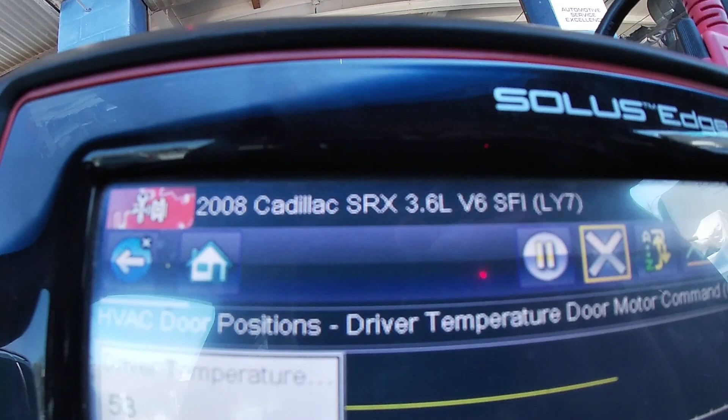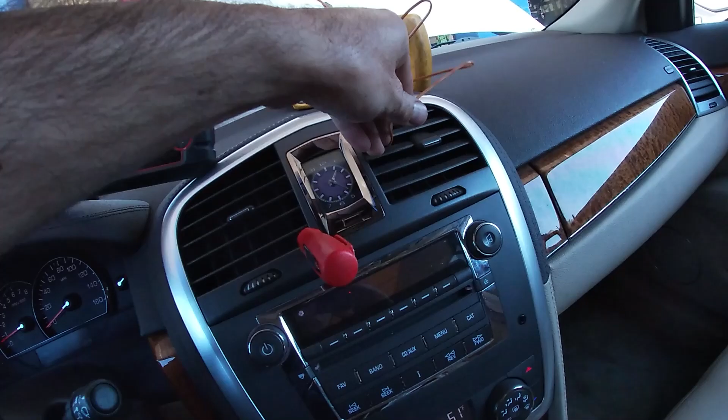Got a 2008 Cadillac SRX with a 3.6. HVAC. Air conditioning, we got 50 degrees on the driver's side, and the passenger side, this says 150, but it's a little dramatic, clearly. So I'll put it in the driver's side. Switch over here to verify our equipment. Come down 79, 75. So I'm going up to 140. Oh, so it might be pulling 150. Might be accurate there.

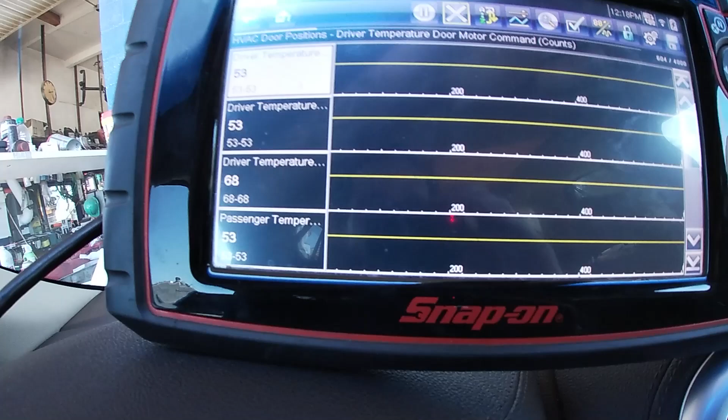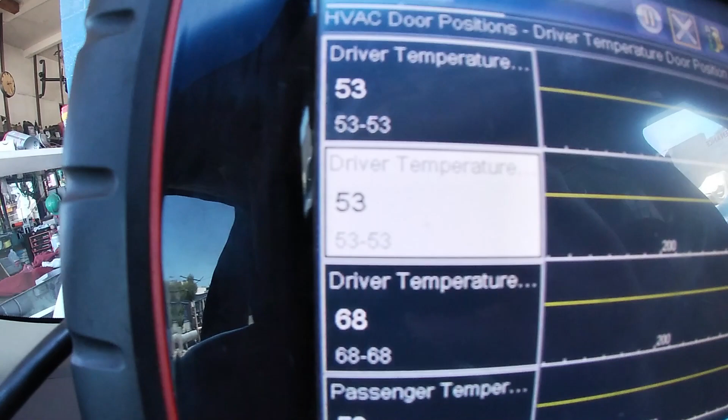So 58. So what we got is dual climate controls, driver temperature, motor command, and counts. And then we got an actual position, 53, and then the temperature, 68. It's in even numbers, so it should be 68. Oh wow, odd number. But then it skips 70, so that doesn't make much sense. But 69, gonna go down to 60, and we're seeing the drop. Goes down to 62 minimum, go back up.

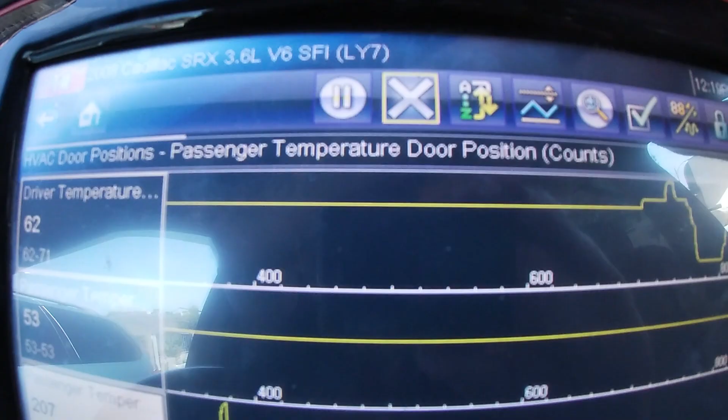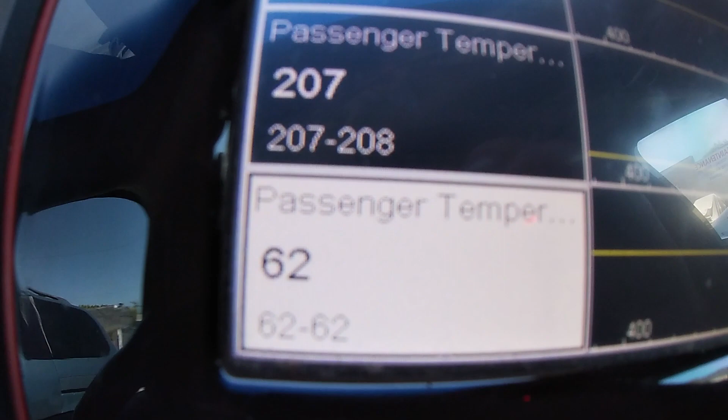I can feel a slight change, not much. It's only 60 to 70. Let's go back down. 61, we're gonna be looking at passenger side. So right here we got door position and counts 207. Passenger command 53. There's the problem. 62. So the control head is working, sending the signal out to the actuator. So let's verify power and ground and hopefully a potentiometer signal of some sort.

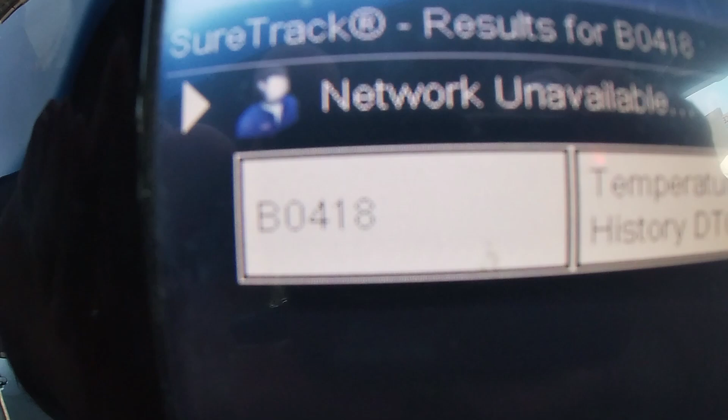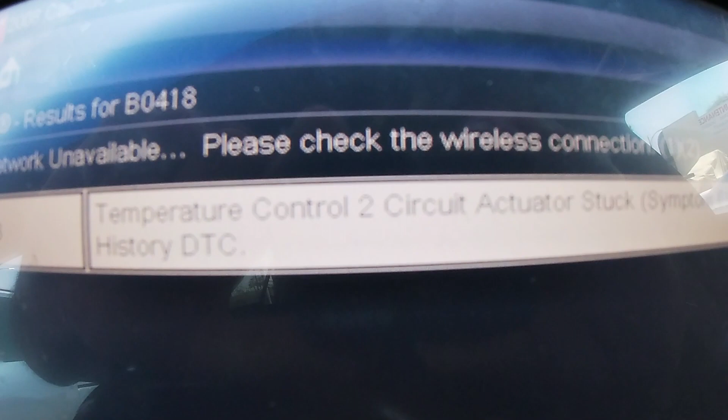And then on that, I'll show you the code real quick. 146 now. Wow. And it is a B0418 Temperature Control 2 Circuit Actuator stuck, current and history. So blend door 2 passenger circuit actuator stuck. So let's verify power and ground and just see some sort of movement on one of the wires.

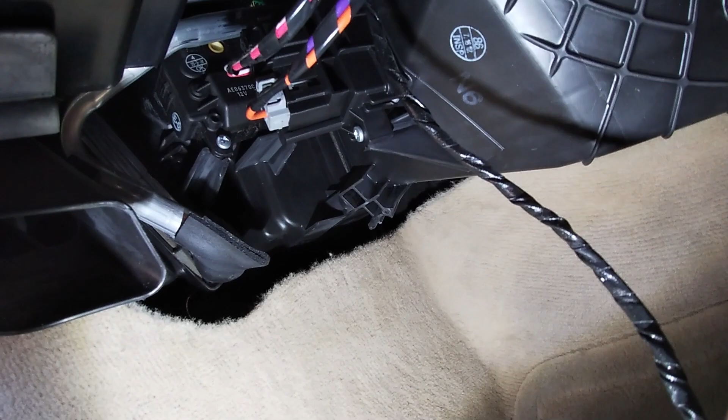Well, welcome to the belly of the beast. There she blows, right there. Here's the blower motor resistor of some sort. Okay, well anyways, yep, out there. And they did a great job in putting the heater core pipes right in the way of the top bolt, top screw on the top right hand corner. So I don't know how I'm gonna get it out, but I got this one a little loose. And gonna try and get that guy. See if I can get a light up in there. Oh, it's not in my face. Right there. Stupid.

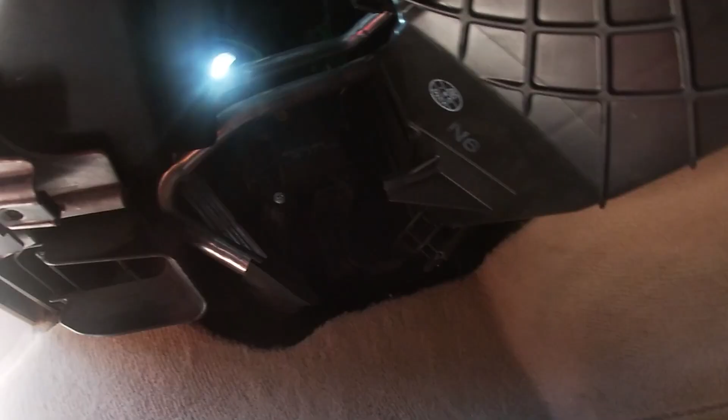Got the blower motor resistor because there is no way to get to it. So I guess right now I could check electrical, but I might as well check electrical and watch it move. But yeah, this pipe, man. Why would you guys do this? Man, everyone's doing the driver's side. I guess I'm lucky.

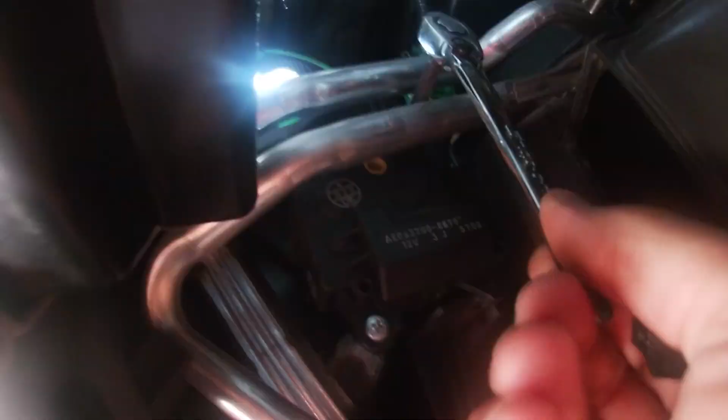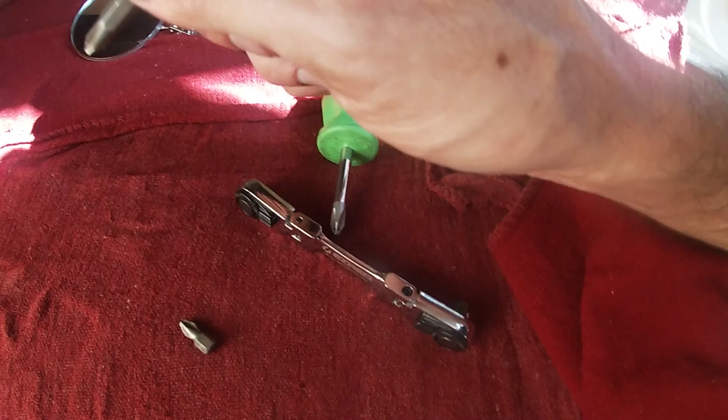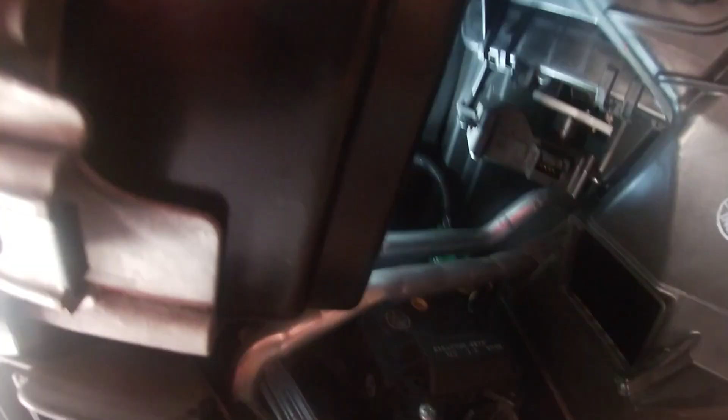I'm doing it. Oh, no. Doing it with the, because the short guy's right there. So long Phillips bit. I was using the Easy Red, but it was giving me too much flex I didn't need. So keep it straight, right angle. Just doing it. We're getting there. We'll get her out. I promise. There it is.

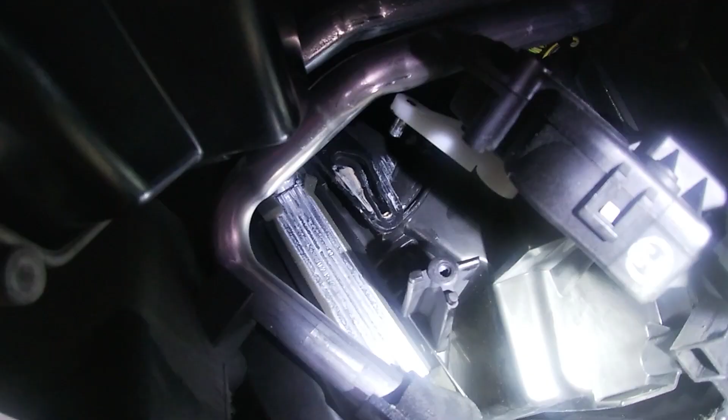Gonna be hard to show. Alright. Whoa. Hey, how's it doing? As you can see, here's the passenger side air temperature control motor 2. Air mix motor, blend door motor, whatever you want to call it. SAE, Society of Automotive Engineers, please make a term for this and let's just all call it that. But you know how manufacturers are. So anyways, oh, there's the door. She's free flowing. So most likely the actuator, obviously.

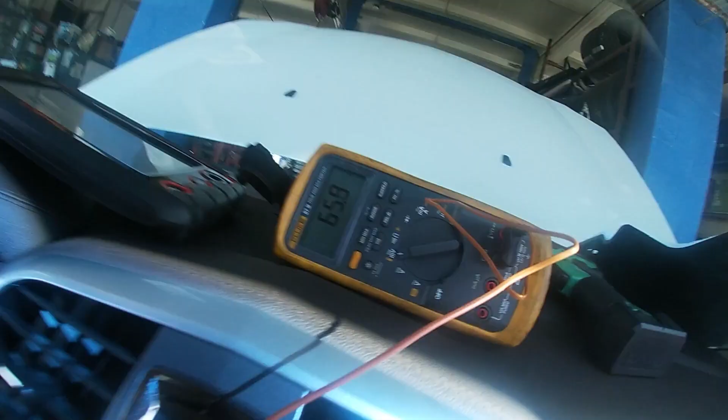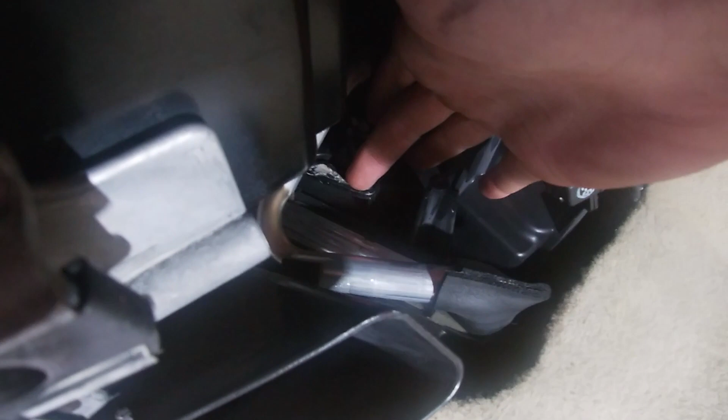It's a warm one today in California. Get the windows open, doors open. The point is, it's a little cold on both sides. Blow. Cool on the other. So I'm gonna move the door. In the upright position. And now we got heat. Core pipe. So tech tip, do the job when it's cold.

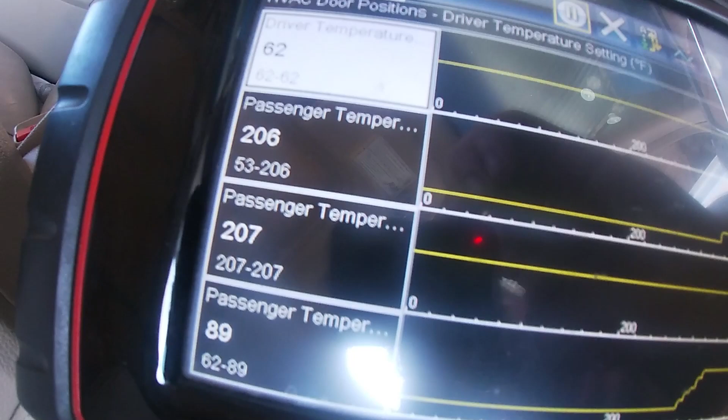So now let's press some buttons. Well, let's press some buttons with the scanner and let's watch the actuator move. Alright, I haven't put the scope on it yet. Part's coming tomorrow, so I have some time. So here's the passenger side. I'm gonna hit hot. We went all the way to 90 degrees. And actually this is the desired and the actual matching each other now. Full heat, 206, 207 counts. So now we're gonna go down on the counts.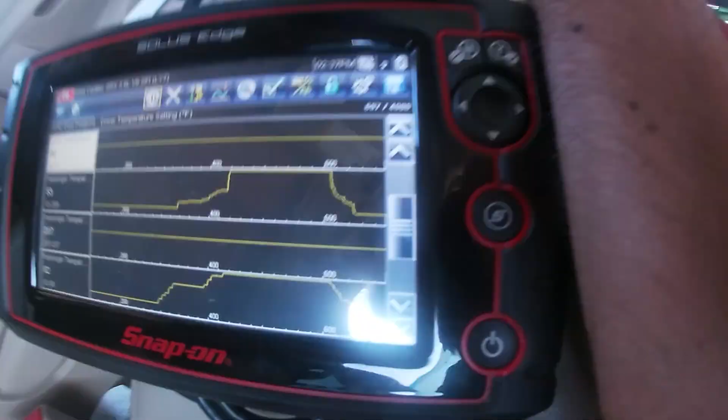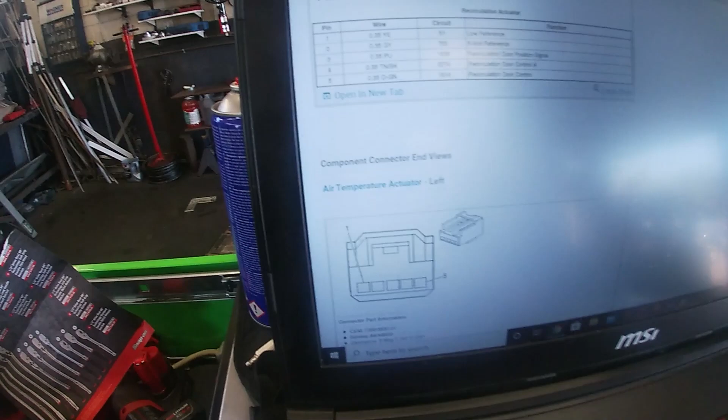That arm is stuck. We got command. Nothing. So from this, I got the temperature. So now the testing I can do is do key on, be quieter. I just want to do some voltage checks and I'm done. So here's the, oh, it's mode. Recirc, air temp left, and air temp right. 5 wires.

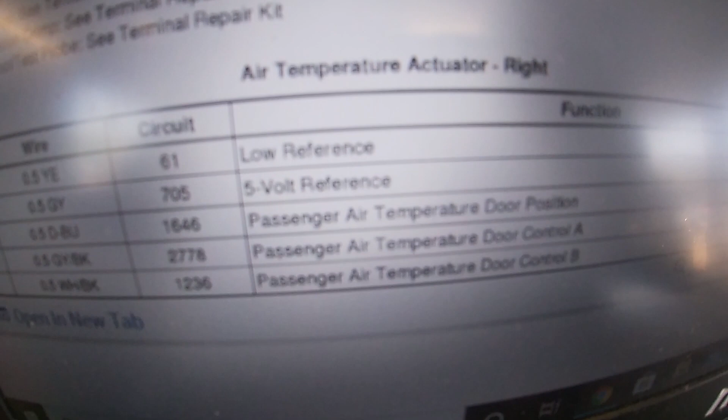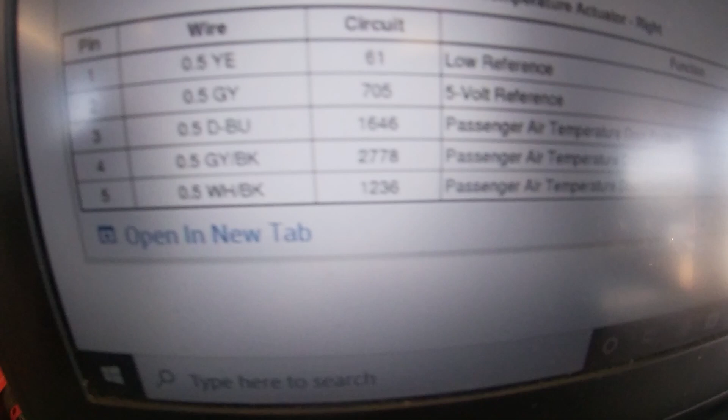We got a ground, a 5 volt, a door position, that's the feedback, and then 2 controls, so hot and a cold. So I want to be checking, obviously, the 5 volt and the low. I'll do a signal to that and then my ground on that. So if I have 5 volts, I know my ground is good and the 5 volts is good. Kind of kill 2 birds with 1 stone.

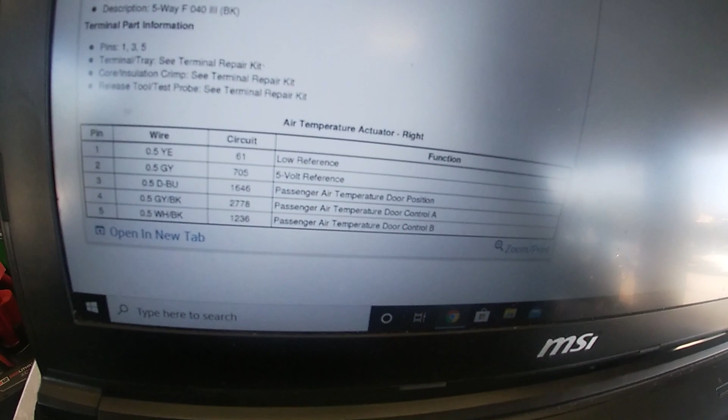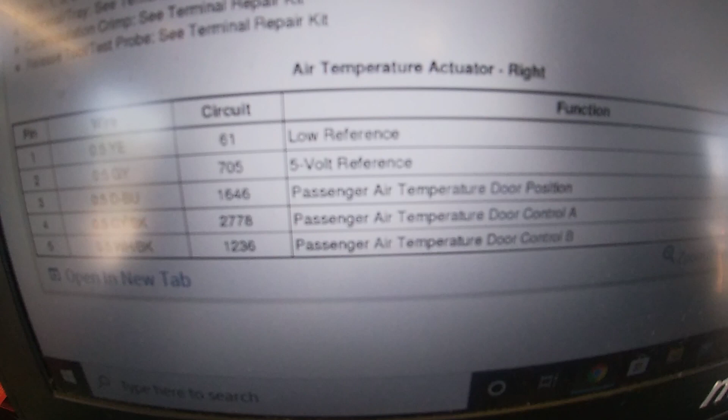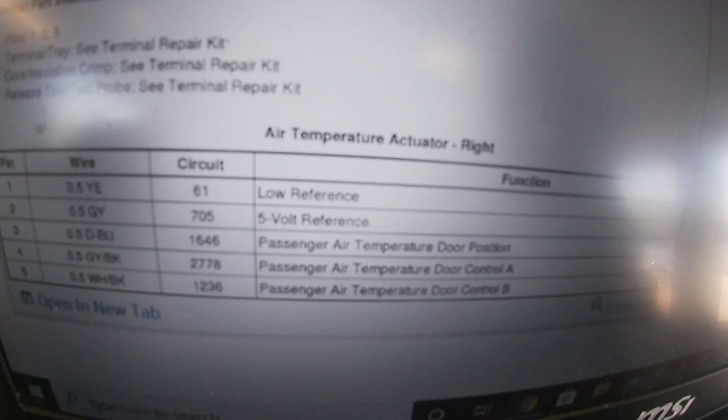Normally I kind of just like to ground out my ground lead and just go to both of them, but yeah, we'll do both. Show it's the same thing. But then door position, I'm not gonna really pay attention to that because that's working essentially. That's why it set the code, is because it's stuck at 270 counts or whatever, 207. And so that circuit's working. And in theory, that says the 5 volt and the ground is good, but we'll check it just for the sake of checking it. And then yeah, I'll for sure want to see on this gray black and a white black some movement of some sort.

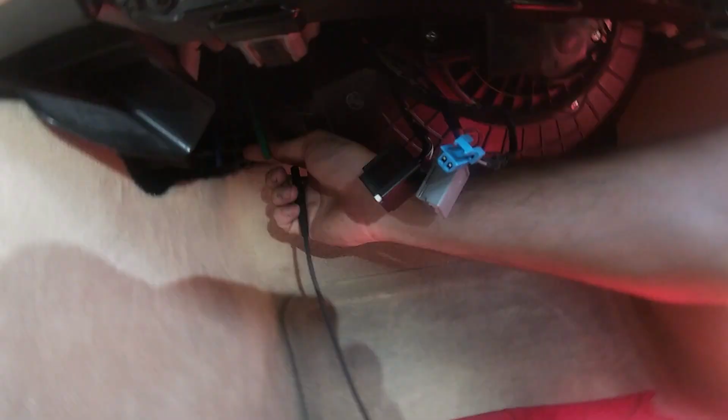5 volts, baby. Got the ground and the 5 volts. And what I could do is, that's ground. If I go to power, so nothing, 0 volts, 0 volts. When I go to power, I'm reading 12 volts. So green, positive is my ground.

Come on, little guy. We gotta go home today. It's 4:57. So there we go, connected.

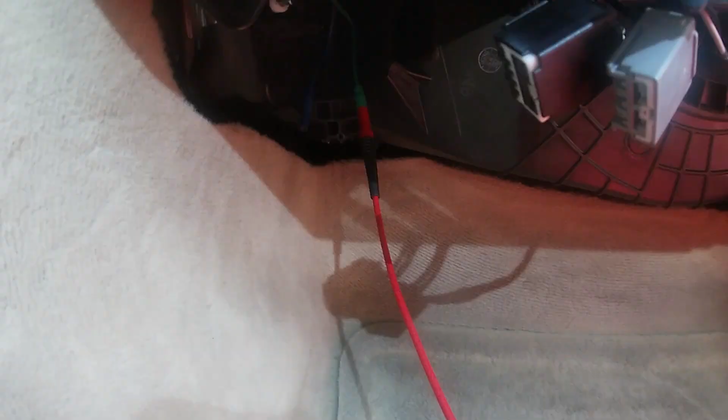Blue is my 5 volts, green is my ground. Red lead to that, and it's just ground. So then this should be, if I go to my ground lead to positive, should be -12. And that's when I know I have a good ground loaded by the meter. And we obviously know we have the 5 volts. So the only one left is the 2 commands. These last 2.

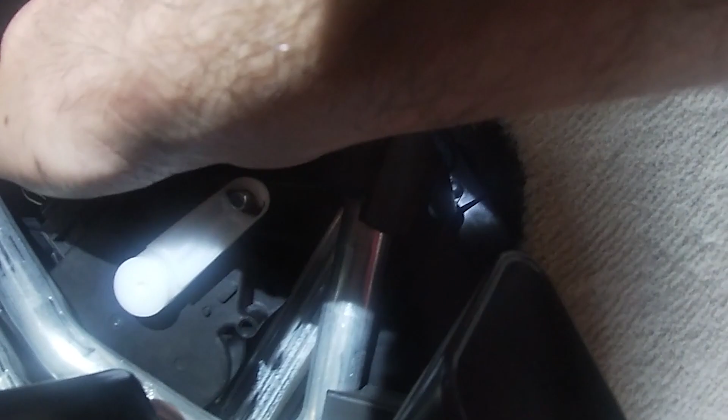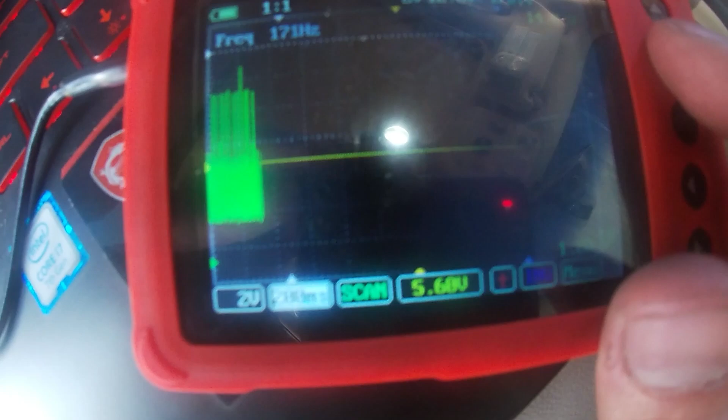Get in there. Pretty sure that's in there. I know that guy's in there. Here's a scope. Key on. Some sort of data. So the control's good. It's there. And it flatlines after a while. And no matter what I do, it doesn't come back until I go key on.

We'll run it. Go all the way down to cold. Flatline. I'm gonna go hot one. One more, one more, one more. Nothing. Keep going up. Nothing. Come back down.

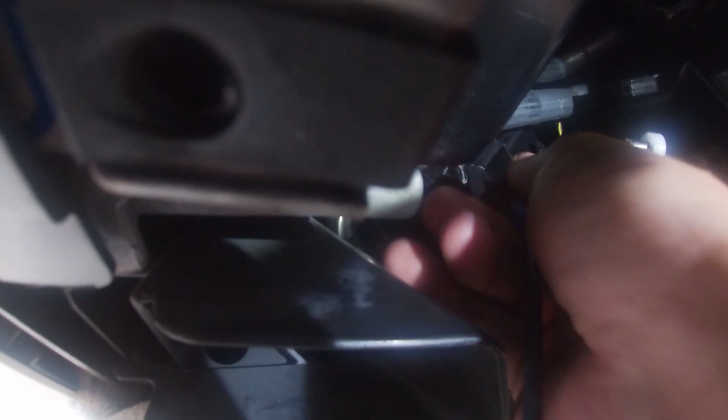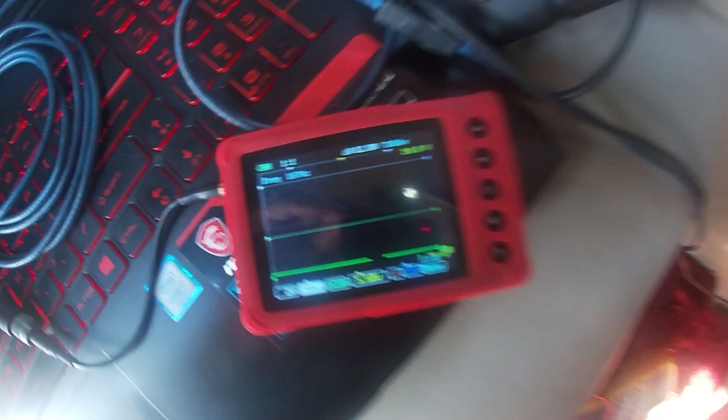I'm on the green lead, so we'll switch to blue. Alright, blue lead. Oh shit. Blue lead. Nothing. But it's elevated above ground. I'm gonna go key off, key on, and we still have the same control. So we're good. Dead actuator.

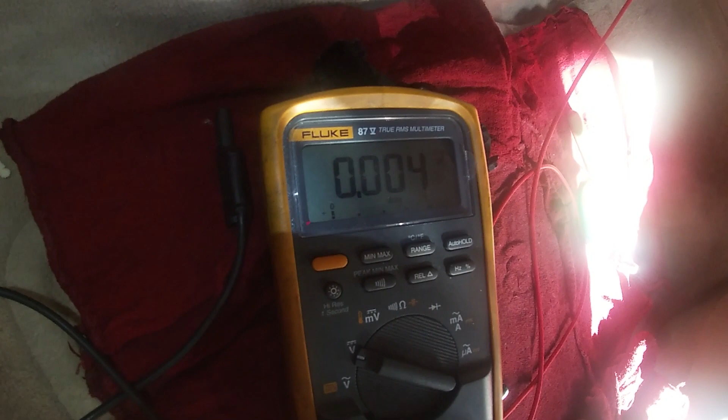Now, can you use a voltmeter to test this? So the normal flat line is a 1/2 volt. I'm gonna go key off, 0, key on. So all that noise is a 6.4 volt average. So I guess you could test it with a digital multimeter, but you're not going to get the picture of the scope. But you can measure your 5 volts, you can see control activity of some sort, and that's pretty much it.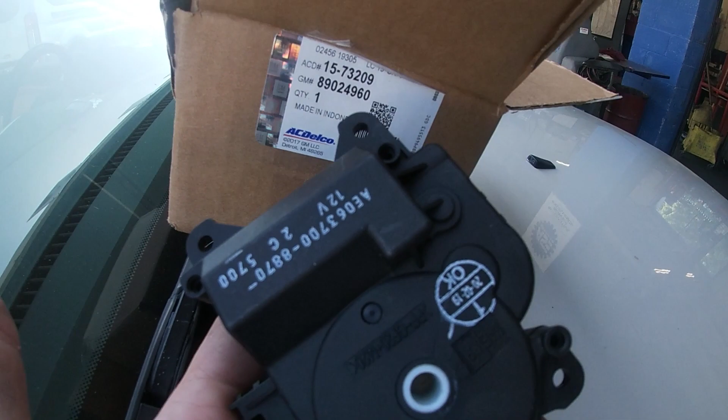Call on the actuator. So we got the new one. Okay, so new actuator, ready to go in. So what I did is put data backup for the driver's side and then the passenger side. I took the temperature away just to make it all on one screen. This is desired and actual of the motor counts. Motor command and counts. And you can see obviously 53 and 205 don't match, but 53, 55, those are pretty close. So when I unplug it, that 205 should go away.

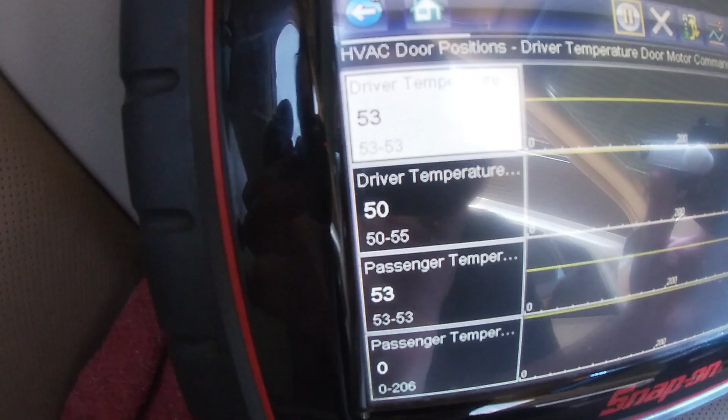Unplugged. It actually affected the driver's for some reason, but that passenger 206, 205 went down to 0. So now you can see they're in slightly different positions. So when I plug it in, it's either gonna move and or for sure change the data. Alright, so there we go. It's already moving. Hopefully you saw that. And there was the movement. It went straight up to whatever.

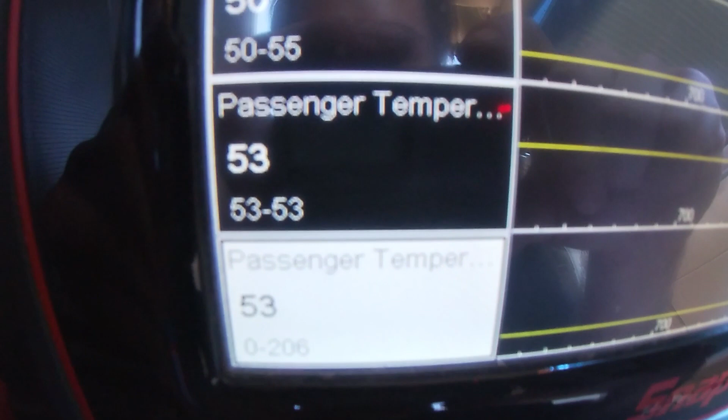Let's see. I'll pause it. Let me zoom in. So boom, connected it. And it read the position it was in real quick, which was 206 apparently, and then you saw the arm move. So the curve down is the arm moving into position, 53, I would assume. So I'm gonna save this just to save it. Go back to record, and then now they should match. Yeah, and I'm sure we saw that. What moves? So, arm back in, and she should work.

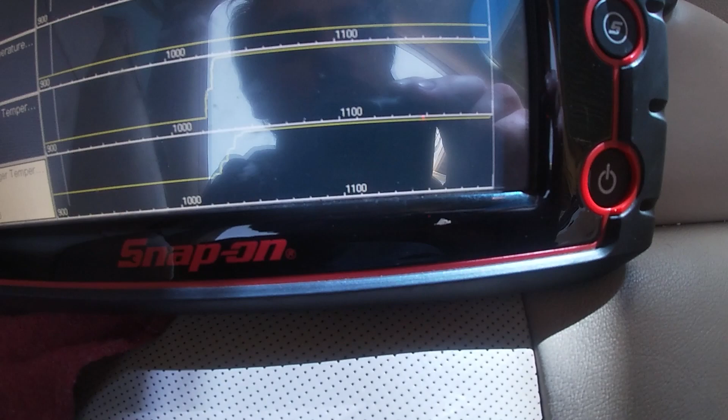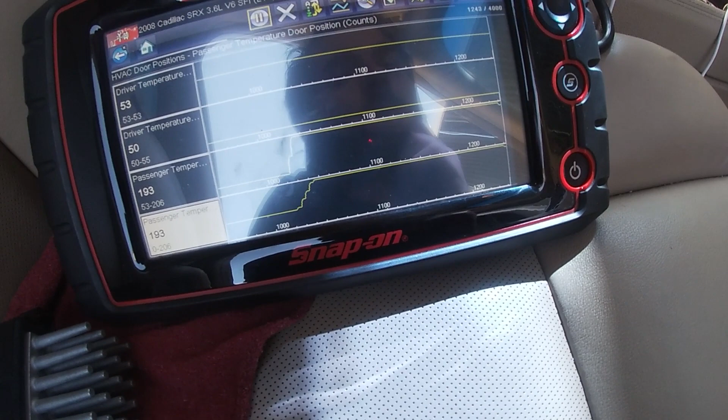But we can, for the heck of it, so we're at 60. Go hot, hot, hot. And boom. There she blows. Now we're on full hot. Now, 90 degrees, now we're full hot, but it didn't change. So 90, 80, it's the exact same setting. So watch when it changes. 73, 72, 71. So 71 is when it changes. 71 to 90, there's no change.

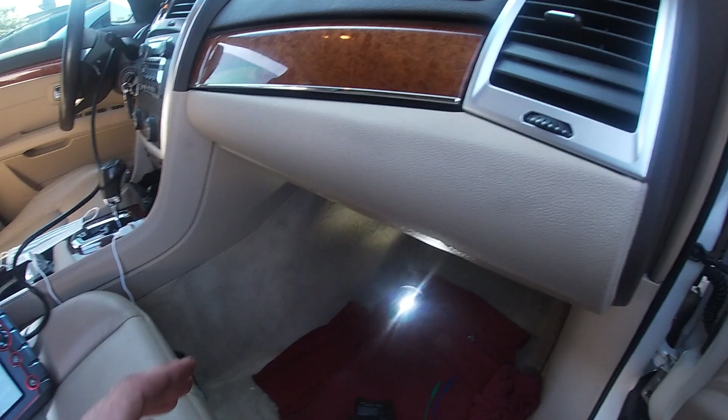That's gonna be a fix. I've already showed you the temperature is the same when you move the door, so no need to show you that. We're all good. We're fixed here, baby. Passenger side blend door. Air temperature actuator, air mix motor.